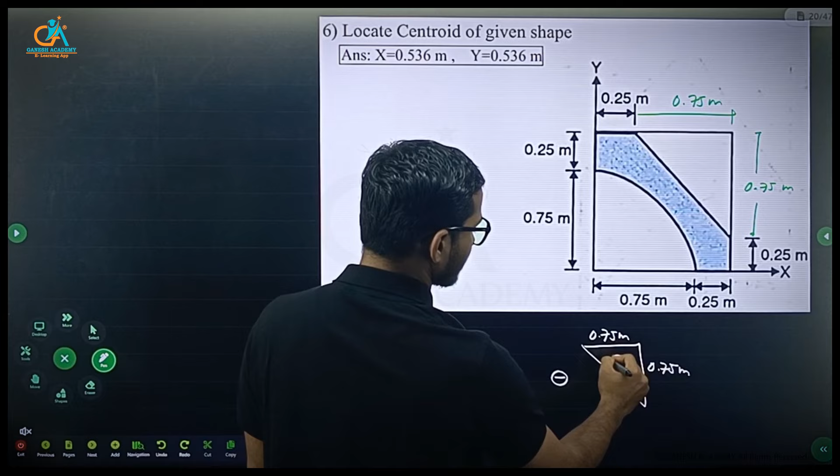So it is in the first quadrant. All the values of x and y at that point simply mean the individual centroid coordinates will be positive. So let's find it first for the square.

First figure, square of side equal to 1 meter. This is the x-axis, y-axis, this is origin. Here the centroid will remain at the center of the individual square, so G1.

This distance is x1, and this distance is y1, correct. So what is the area of this? 1 by 1, so 1 meter square is the area.

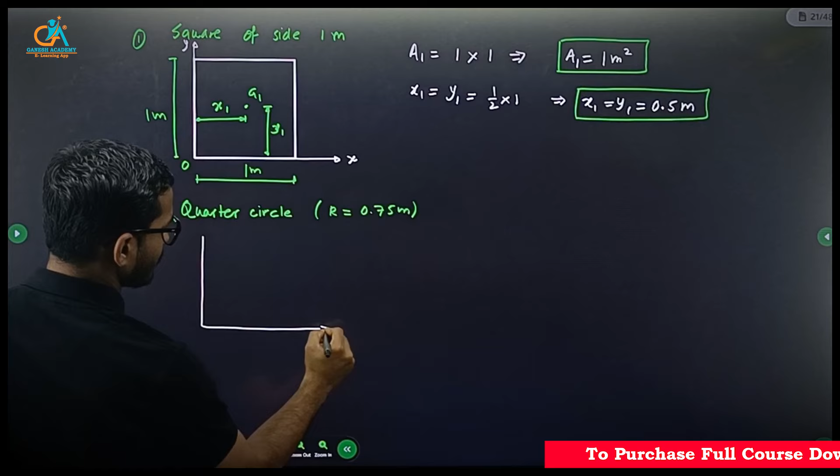Having radius equal to - this is the radius - 0.75 meter, with x and y axis. This is origin O, radius is 0.75, correct.

The centroid is somewhere here, let's say G2 for the second diagram. This is the first standard area, second standard area, and this will be y2 and x2. So x2 and y2 are nothing but the coordinates of the centroid point G2.

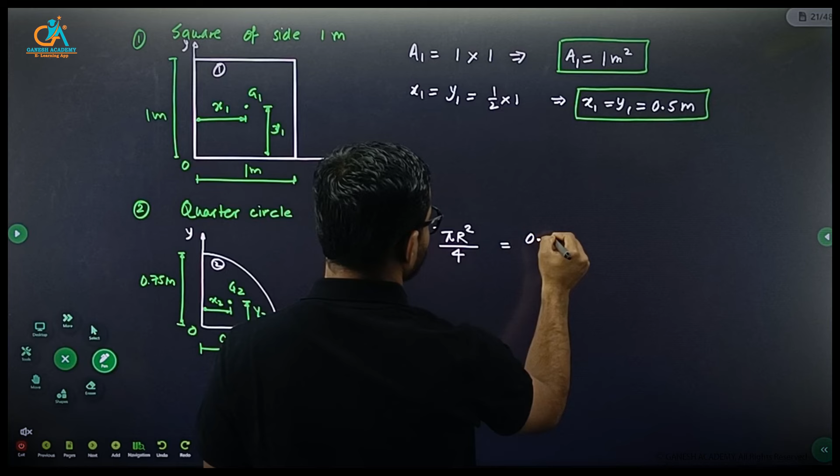First find the area. So area 2, that means area of second figure, quarter circle. Area of circle is pi r square, and quarter circle is 1/4 of the circle, so area will be pi r square divided by 4, where radius is 0.75.

This comes out to 0.441786, which you can approximate to 3 or 4 decimals as 0.4418 meter square. Then next is x2 and y2.

For the quarter circle, from this origin, x2 and y2 are both identical, so y2, x2 equals 4r by 3 pi. That is equal to 4 into 0.75 divided by 3 pi, which gives 0.3183. So x2 as well as y2 equals 0.3183 meter.

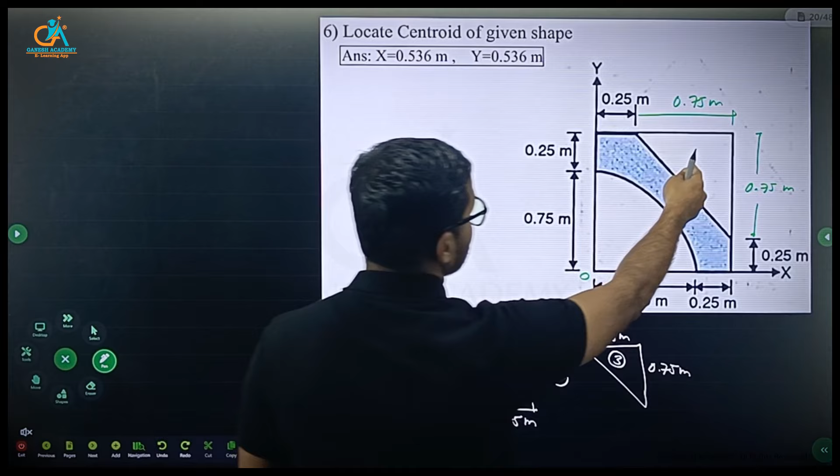Then the third figure is the right angle triangle, with x-axis like this and y-axis. This is 0.25 and this is 0.75 meter, this is 0.75 and 0.75, and obviously this is 0.25. Somewhere here you will have the centroid for this right angle triangle.

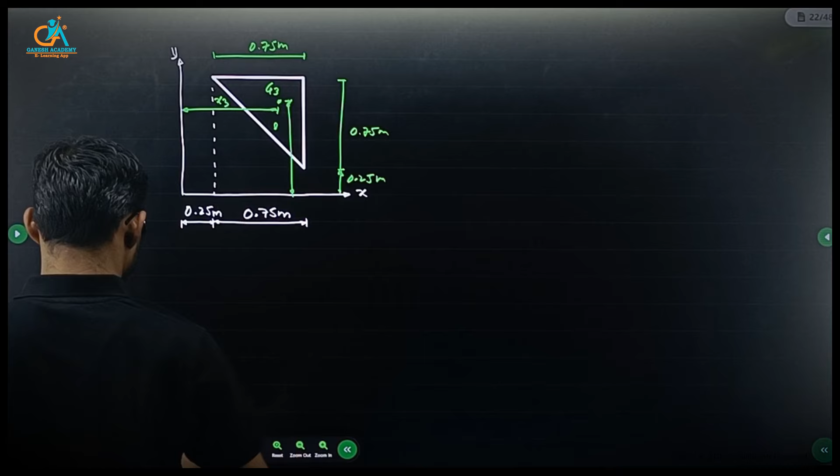Now this is x3, and here we will have y3. So find first the area - this is third figure, A3 for triangle, that is half base height, where base and height both are 0.75, giving 0.28125 meter square.

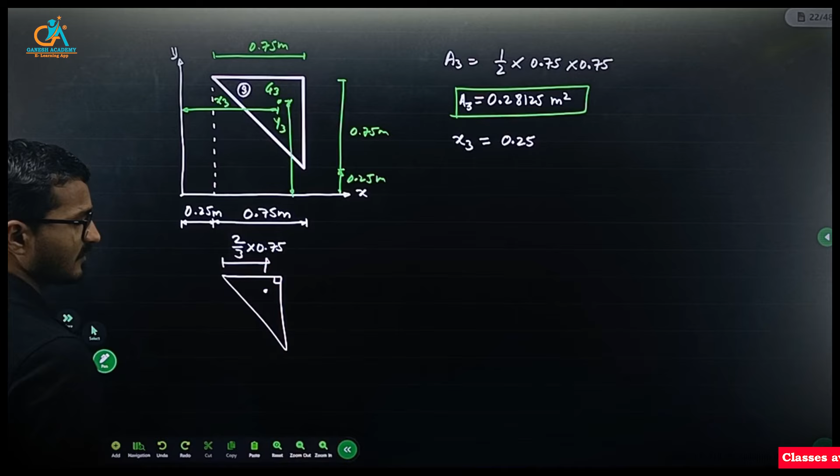Then x3 is - this is 0.25, and for this triangle from this side your distance is 2/3 of base, where base is now 0.75. So we need to add this distance 0.25 plus 2/3 of 0.75. So with respect to O, the x coordinate of the centroid is 0.25 plus 2/3 of 0.75, which comes out to 0.75 meter.

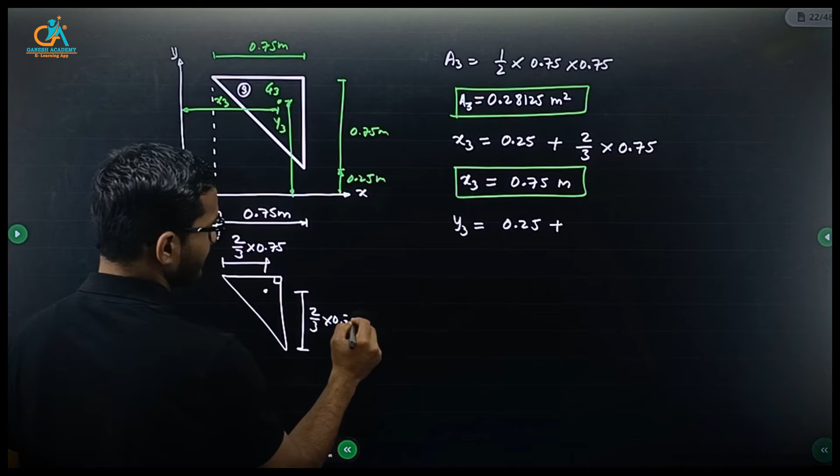Then y3, again same - this is 0.25 plus this distance, which is again 2/3 of 0.75, by standard formula. So 2/3 of 0.75, similarly y3 is also 0.75.

Now substitute all the values in the formula. X coordinate of the centroid equals summation of A,x upon summation of A, by the concept of moment of area. So it is a combination of three figures where we are subtracting the quarter circle and right angle triangle from the entire square: a1x1 minus a2x2 minus a3x3, whole divided by a1 minus a2 minus a3. Area 1 is 1 and x1 is 0.5.

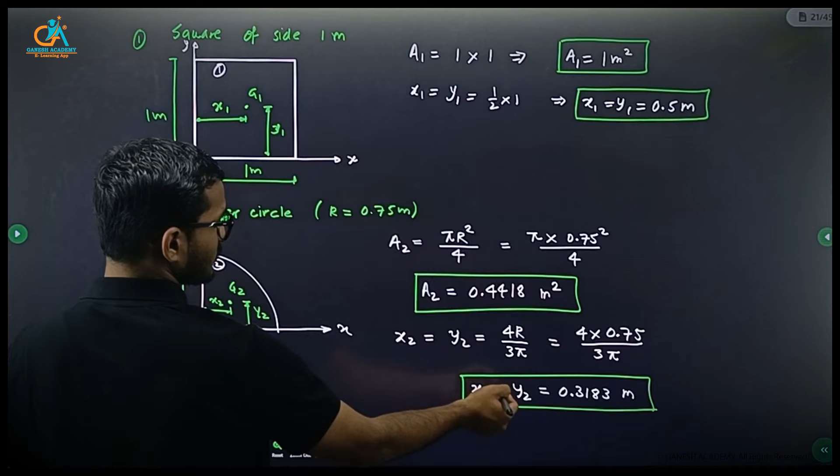Then area 2 is 0.4418, into CG distance x2 which is 0.3183, minus A3 which is 0.28125, into CG distance 0.75, whole divided by area 1 minus area 2 (0.4418) minus area 3 (0.28125).

Calculate the value of x bar. So it is 0.5359, approximately 0.536 meter.

In the same way, y coordinate of centroid, y bar, equals summation of ay upon summation of a. So a1 y1 minus a2 y2 minus a3 y3, whole divided by a1 minus a2 minus a3.

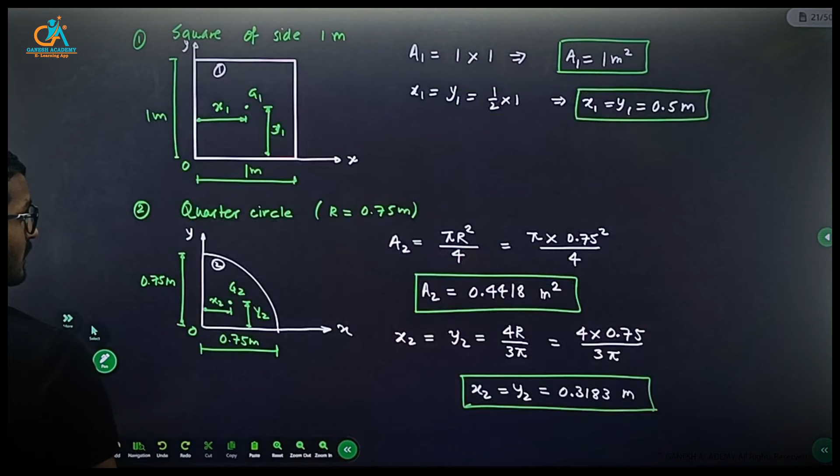So 1 into 0.5, then 0.4418 is the area, into y2 is again same, 0.3183, and y3 is again 0.75. So 0.3183, 0.28125 into 0.75, then 1 minus 0.4418 minus 0.28125, which is again same, 0.536.

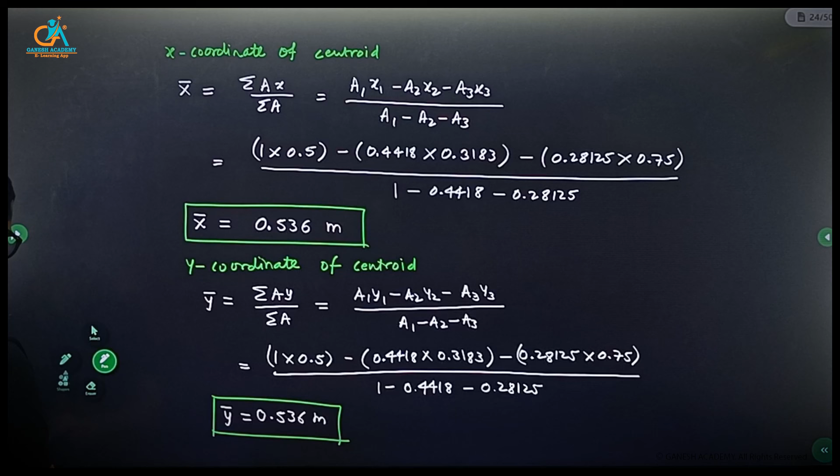Okay, so as the given figure is symmetric, what you can say? The x and y coordinate is identical.

So you can draw an axis of symmetry, something like this. About that axis of symmetry, it is symmetric, so your CG will lie somewhere here, both same. So here we have centroid G having x and y coordinate as 0.536.

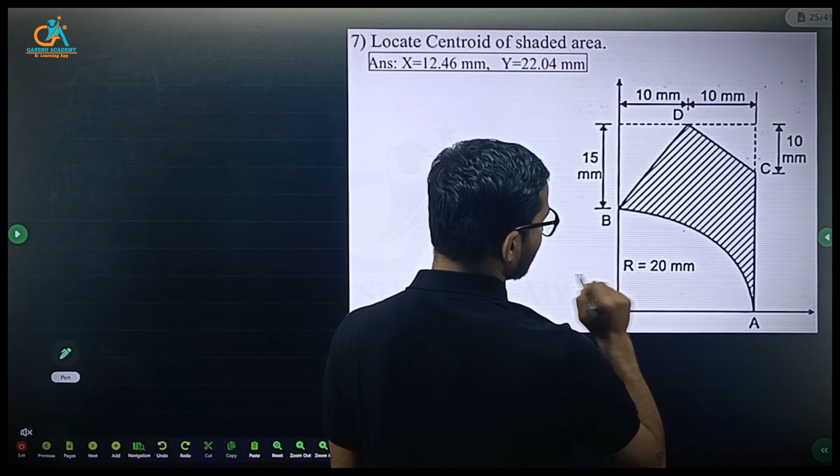In which we have to consider this entire rectangle and we have to subtract this, resembles as a quarter circle of radius 20 mm, and there is one additional triangle here. So kind of similar numerical, we have one additional standard figure here, so its centroid we need to find again, same right.

So what are those 4 diagrams? First is this rectangle, then in the same way you need to subtract these 3, right angle triangle, and then this quarter circle.

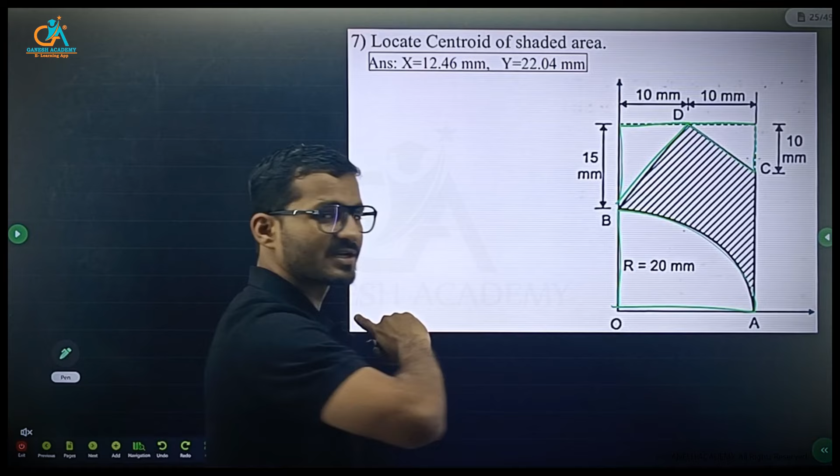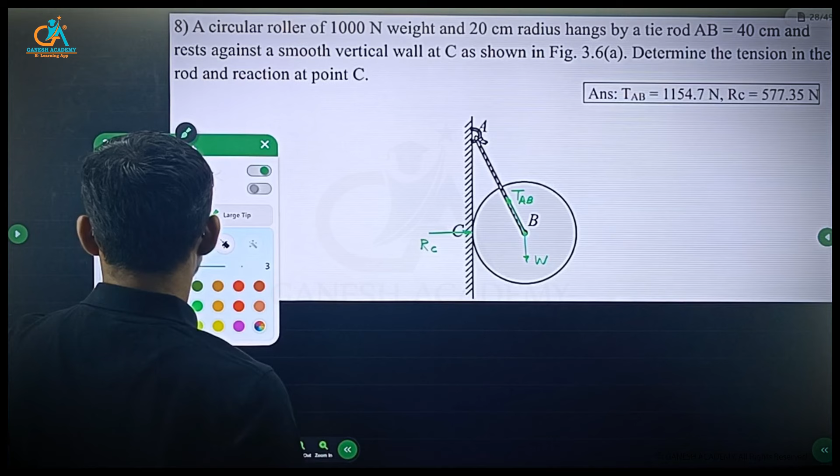Yes, so this is basically a roller. Here is the center through which the weight is supposed to act. Okay, now here we have reaction, and tension in rod AB.

Now I am going to consider this line of action, and I can just shift this force, and make the point of application through the center only, that is B. So what I'm going to draw is the same diagram, but with a different point of application for this RC.

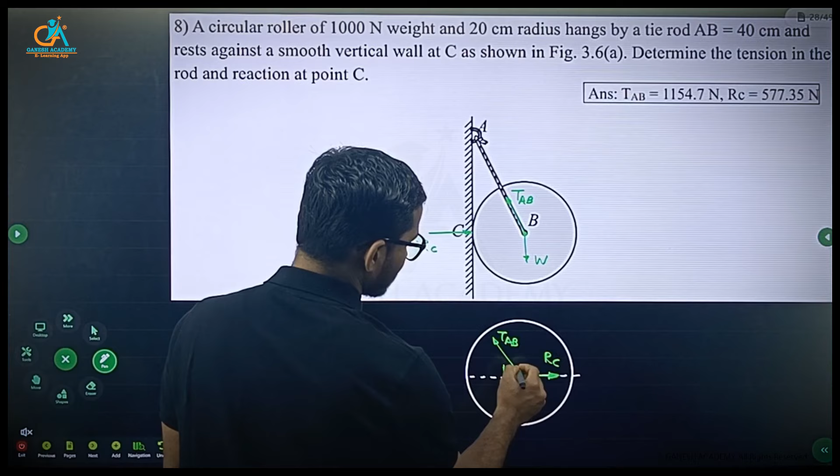Now using Lami's theorem, you can easily find the tension in the rod and the reaction at C. First we have to find the angle between these two forces. This is basically a concurrent system involving three forces, pull type of forces. So first we have to find this angle. This is straightforward 90 degrees, but we have to find the other angles. Okay, how to find those angles?

So there is some data given. This weight is 1000 Newton and the radius is this radius, it is 20 centimeter. And the length of AB is given, which is 40 centimeter. So what I am going to draw here is the triangle.

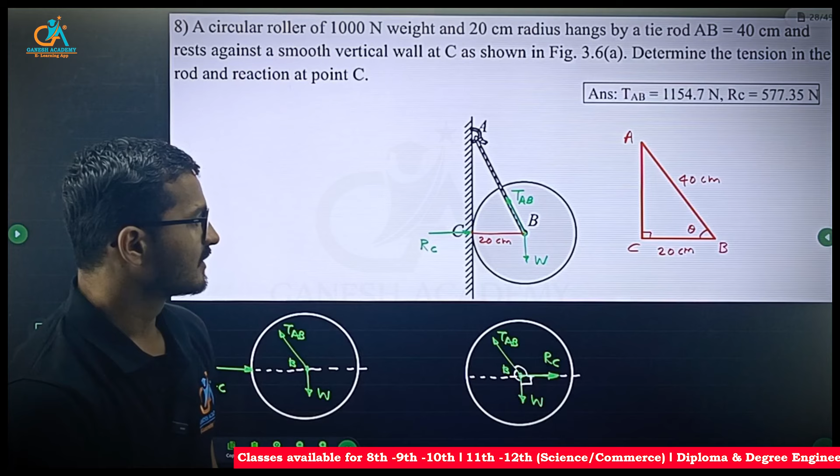So there is a triangle, this triangle A, C and B, a right angle triangle. I can find this angle, correct? This is 20 centimeter and this length of AB is 40 centimeter. Let's say that angle is theta, correct? So using trigonometry you can easily find this.

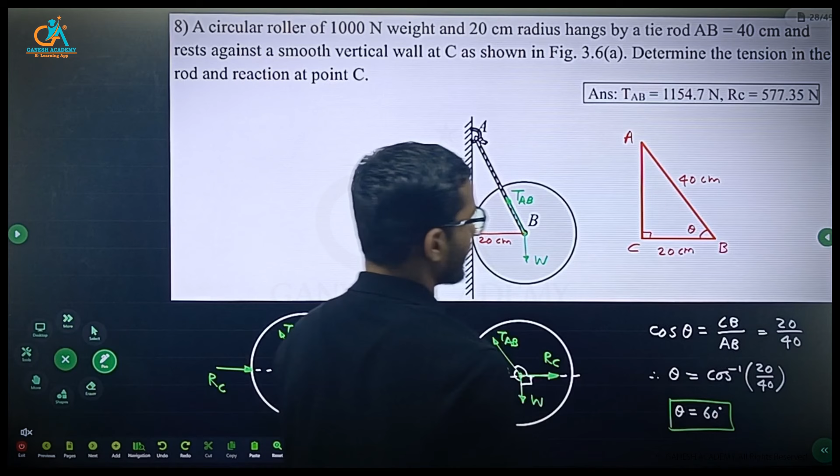Adjacent side and hypotenuse, that means you need to consider cos. So cos theta is adjacent CB over hypotenuse AB, which is equal to 20 and 40. So theta is equal to cos inverse of 20 by 40, which comes out as 60. So this theta is 60 degree. So this angle is 60 degree, correct? This angle is 60 degree.

Now I need to find these angles between the forces, right? So consider this diagram.

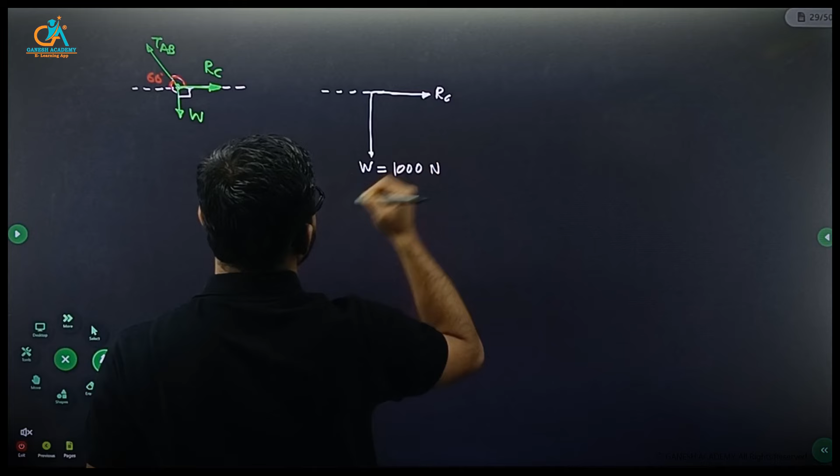There is one force W which is equal to 1000 Newton, and this is RC, correct? And here we have tension in rod AB. This is 90 degree. If this tension force is making an angle 60 degree with the x-axis, this entire angle will be 90 plus 60, that is 150. And if this is 150, this is 90, the remaining angle should be 120, as we all know the addition of these three angles is equal to 360 degree, right?

And now you can conveniently use the Lami's theorem to find the reaction at C and tension in rod AB. What is the Lami's theorem?

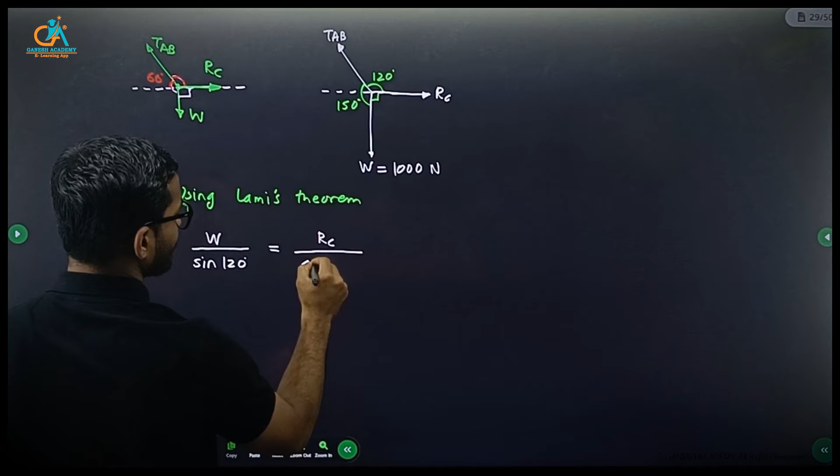The force divided by sine of angle opposite to the force, 120 degree, that is equal to RC divided by sine of 150, and that is equal to tension in the rod AB divided by sine 90, right? Now solve for first RC and then for tension in rod AB.

Now reaction at C, consider first two. W is known, W is 1000. And now solve for RC. It is 577.35. It is positive, means assumed direction is correct.

And now solve for tension in rod AB. Consider first and last ratio. W upon sine 120 is equal to tension in the rod AB upon sine 90, where W is 1000, sine 90 is you can write down as 1. And tension AB is equal to what? Sine 90 is 1, so what I can write is 1000 divided by sine 120, which is 1154.70.

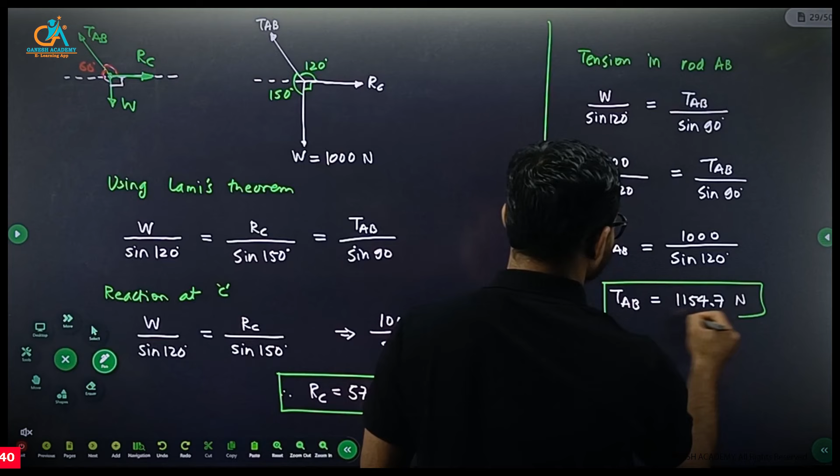Let's check the answers. Yes, both are correct, right? So first of all, you need to find what are the forces involved, then draw free body diagram and show the forces, concurrent forces for better understanding. So that means you need to simplify this into this, right? So concurrent force system involving three forces, so conveniently you can use Lami's theorem here, right? And for the angles, you have to consider trigonometry here, right?

So it is one of the similar numerical from the previous case. Find the tension in each cable. So from diagram you can say there is one cable AC and there is one cable BC, and at C the weight is attached, the mass of 100 kg is attached at point C, and the angle made by the cables is given. One of the angle is given and one the slope is given, right?

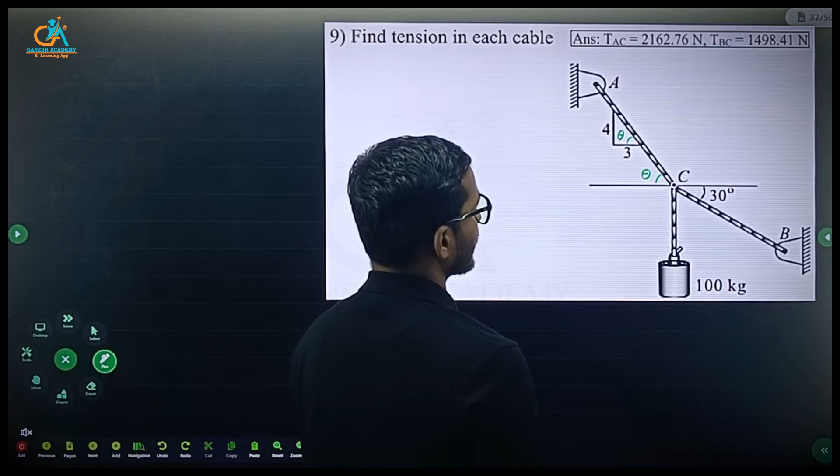So before drawing FBD, we'll first calculate the angle. So here, let's say this is theta, means this angle, right? So consider that right angle triangle. So 4 vertical to 3 horizontal. This is theta. So theta is equal to tan inverse of 4 by 3. It is 53.13, correct. So this is the angle.

Now we have to convert this mass, 100 kg mass, into weight, basically force. So force acting due to mass of the body, we have to multiply this with 9.81, right? So what is weight? mg, and weight is due to gravity. So by Newton's second law, F is equal to mass into acceleration, and weight is nothing but contributed because of the gravity, which means acceleration is due to gravity, and the value is standard 9.81. Unless mentioned, you have to consider 9.81, right?

So first we'll draw the same FBD, right? So obviously weight is going to act in the downward direction, and in the same way, whatever the weight, as these are collinear forces, the tension developed in the cable will be same, right?

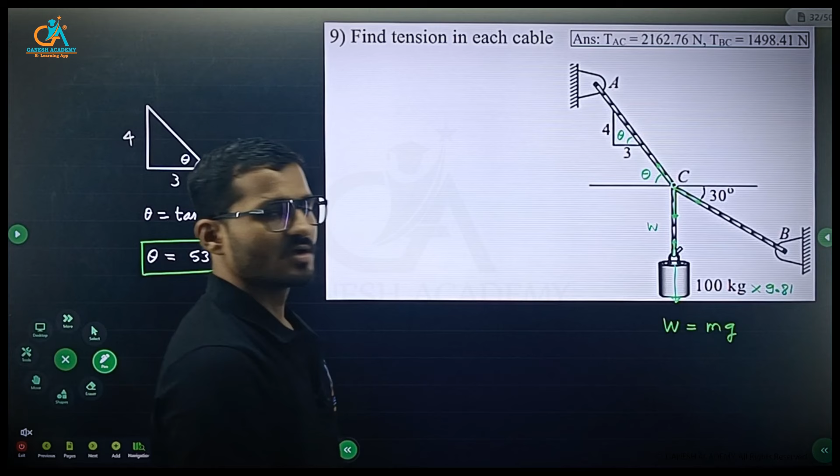And obviously we can show that this is equal to W, right? And here again, these are the tension forces developed in the cables AC, BC, and due to this weight, this weight is nothing but the tension in cable, which is attached to the body.

So let's draw the free body diagram. This is point C. There is weight acting in vertical direction, and there is tension in BC cable, acting at 30 degree with horizontal, and this is tension in AC acting at 53.13 degree with the horizontal. This is your forces, right?

Again we can use Lami's theorem, right? Yes. So we'll find whatever the angles between the forces. Okay.

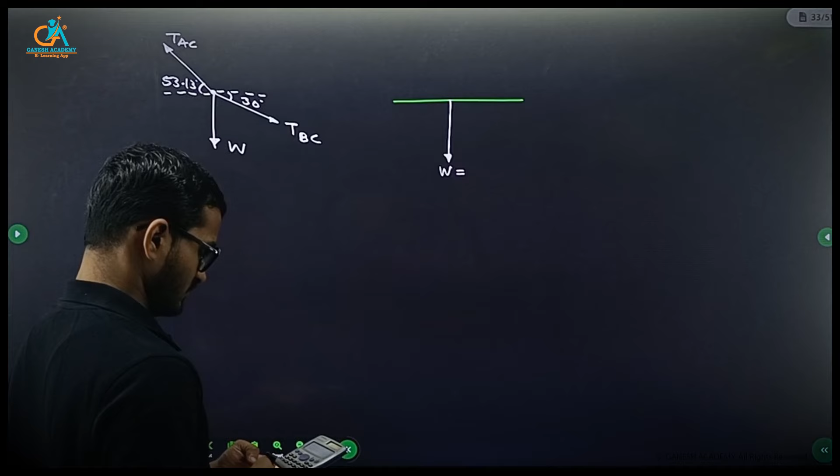This is weight W acting vertically downward, and that is equal to Mg. So 100 into 9.81, 981 Newton.

Okay. The next, the tension force TBC. If this angle is 30, this should be 60, right? Okay.

And we have one tension force AC, right? If this is angle 53.13, this whole angle is going to be 90 plus 53.13, 143.13, and the remaining angle you can easily calculate. 360 minus 60 minus 143.13, that angle is 156.87 degree, right? Use now Lami's theorem. Yes.

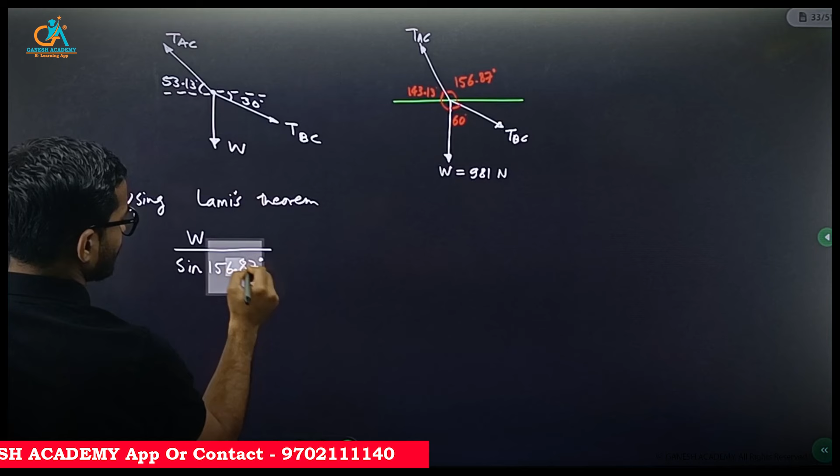What you can write is W upon sine of 156.87 is equal to tension AC divided by sine 60 and tension BC divided by sine of 143.13. So consider first two to get tension in cable AC.

Yes, W upon sine 156.87, that is equal to TAC upon sine 60. Okay, what is the value of W? 981.

Now solve for tension AC. 2162.756 you can write.

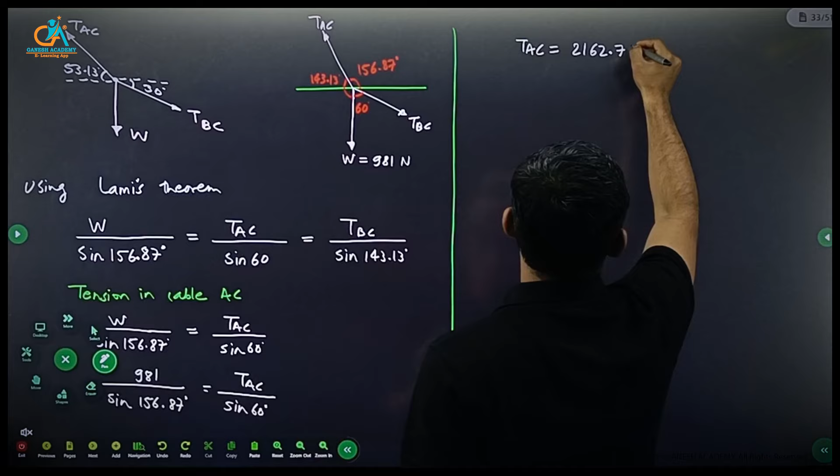And now tension in cable BC. Yes, consider first and third or any two. So W upon sine 156.87, that is equal to tension BC upon sine 143.13. W is 981.

Yes, again similar way solve for tension in cable BC. 1498.4.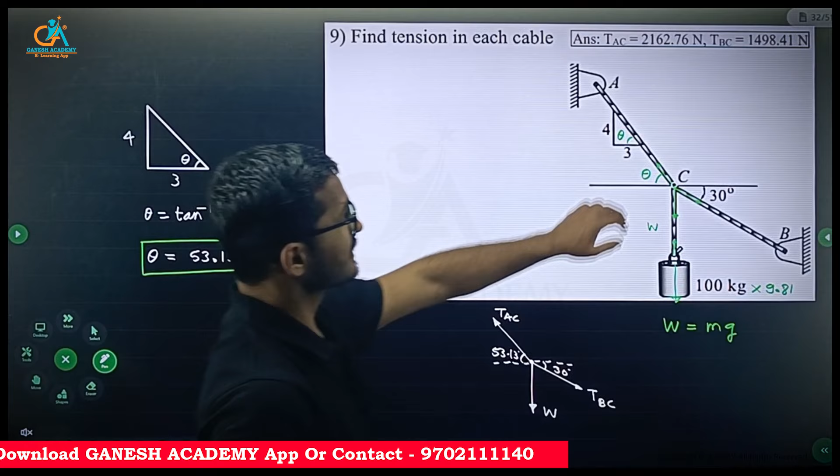Yes, let's check the answer. 2162.76 and 1498.4. Minor changes, that is fine. So both are correct. Okay.

10th numerical. Again, it is kind of similar numerical to this earlier one. This is based on the same concept. Just here, instead of a vertical surface, here we have an inclined plane. So a roller of weight W 1000 Newton.

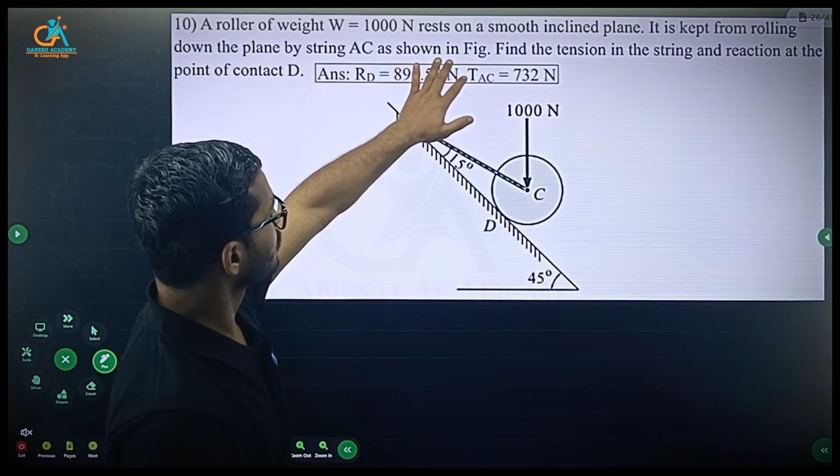So this is weight. Rest on a smooth inclined plane. It is kept from rolling down if it is not attached with anything, obviously due to its own weight, component of weight along the plane, it will roll down, but it is kept from rolling by attaching it to a string, string AC, as shown in figure, find the tension in the string and the reaction at point of contact D.

So in the same sense, obviously we have to find this reaction and tension in the string. So what will happen, at the point of contact you will have this reaction RD, correct, and in the same way there is tension in string AC, but here a little bit of trigonometry is involved.

So first we have to find the angles, right? Correct. So first draw free body diagram. Okay.

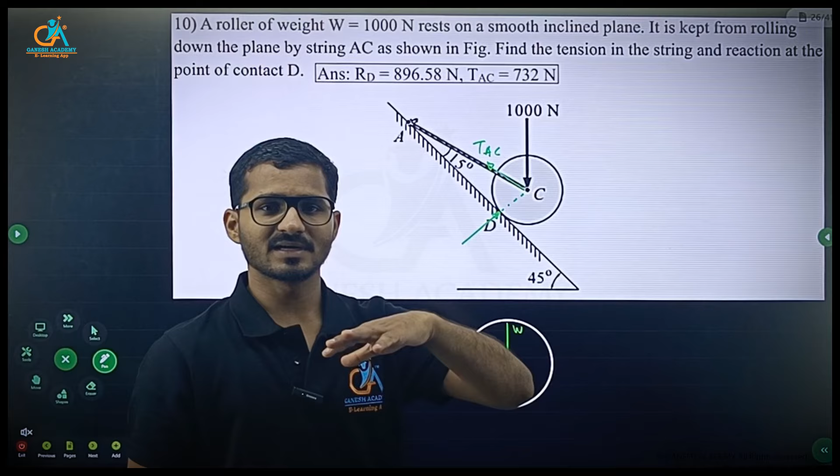The center of circle, and we have this weight acting in this direction. What we know from the trigonometry, at the point of contact, this plane will be tangent, and the radius, obviously we have some theorems from our school time, so this is perpendicular, right? The radius will be perpendicular to the plane of inclined plane at the point of contact. So somewhere here you will have this reaction at point of contact D, and obviously you will have this tension in string AC.

So for the simplification, what we are going to do here is I'm going to use the principle of transmissibility, right? So instead of showing this weight here, I'm going to consider here, right? And instead of this reaction here, I'm going to show that same reaction along the line of action, right?

Okay. Now the next part is to calculate the angles, right? This is, let's say, horizontal. Okay. So I have to find whatever the angle made by this and this with horizontal. So let's extend this just to meet this horizontal line. We know this is 90 degree, this is 45, so this angle should be 45. As we all know, the summation of interior angles of a triangle is 180.

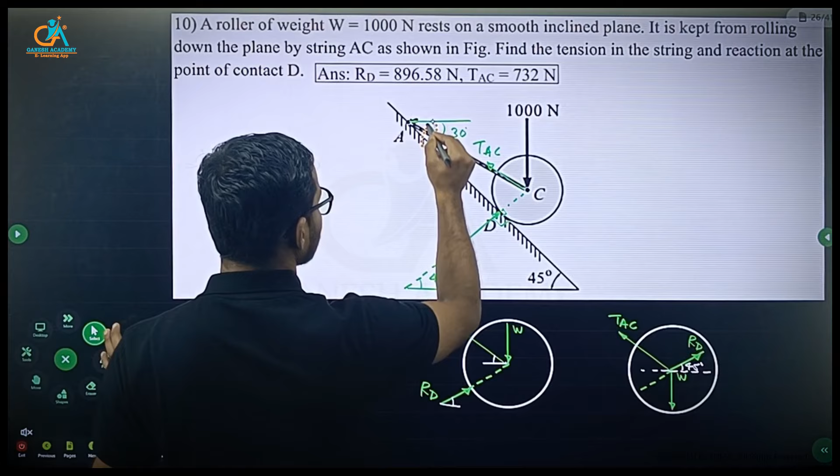And if this is 15, this angle should be 45 minus 15, 30. So this is going to be the angle, correct? So the angle made by tension, what we can show is this is 30, right? Correct? These two angles are equal. So correct? Yeah, let's just draw.

Yes, this is the FBD. Draw the weight vertically downward, the reaction RD inclined at an angle of 45, and the tension AC inclined at an angle of 30, with the point at center C. Now let's find the angles.

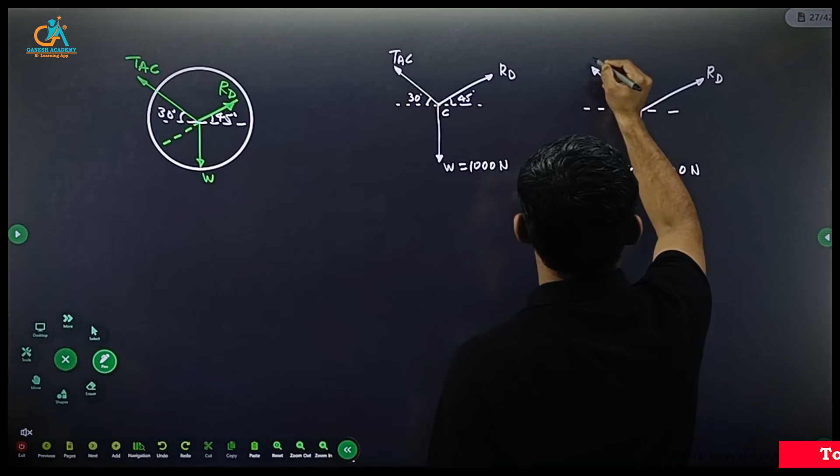Weight is 1000 Newton. This is reaction D, reaction at D, and tension AC. If this is 30, this angle should be 90 plus 30, which is 120 degrees. And this is 45, so this should be 90 plus 45, 135 degrees, and the remaining angle will be 105.

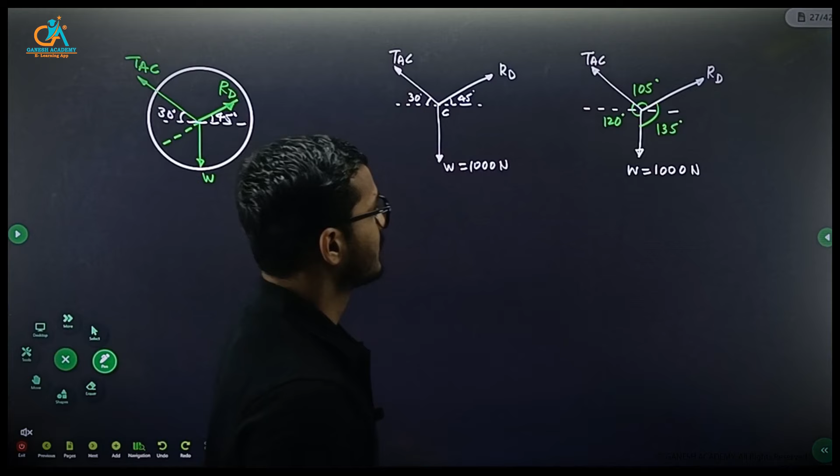Correct? Now apply Lami's theorem here. What I can write is W upon sine of 105 is equal to tension in string AC divided by sine of 135, and RD upon sine of 120 degree. So let's first consider the first two ratios.

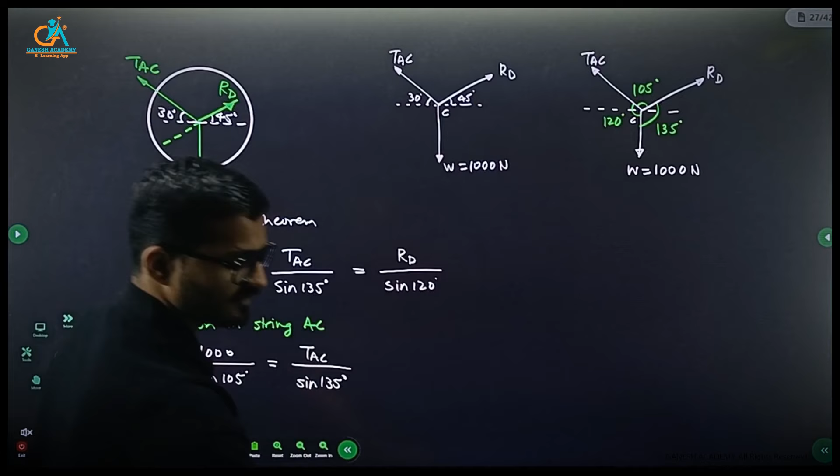So tension in string AC: W, which is equal to 1000, divided by sine 105, equals tension in string AC divided by sine 135. From this you can say tension in string AC is 732.05.

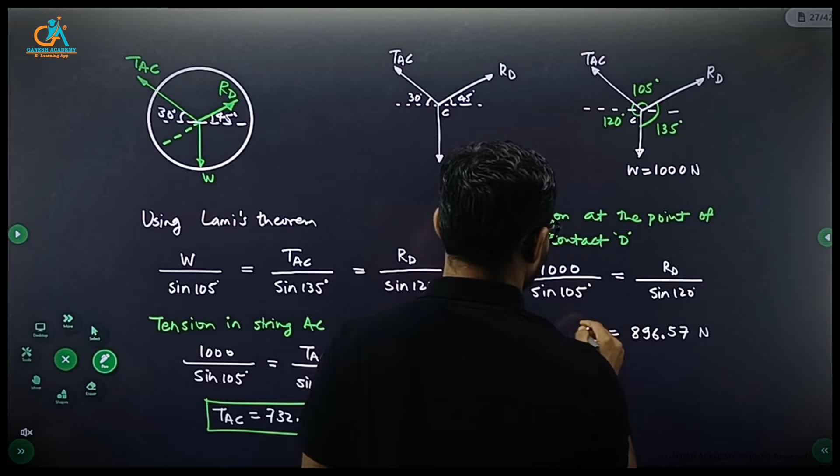Correct? Yes, next reaction at D. So W upon sine 105, that means 1000 upon sine 105, is equal to RD divided by sine 120. That gives 896.575. Both 732 and 896 are correct, right?

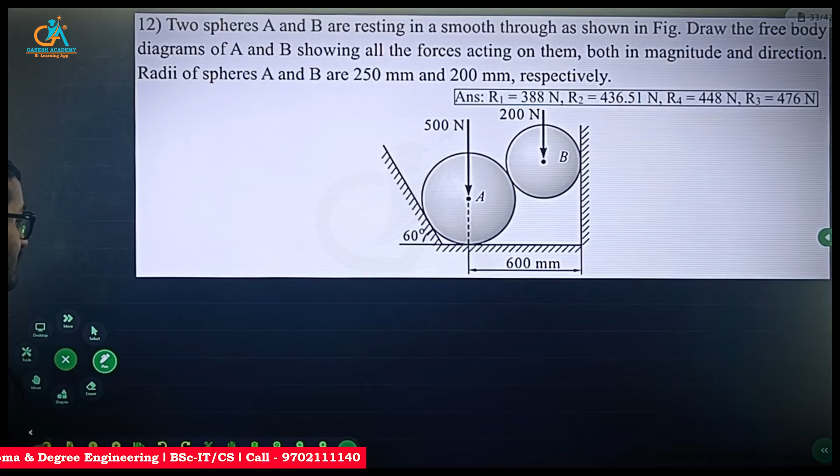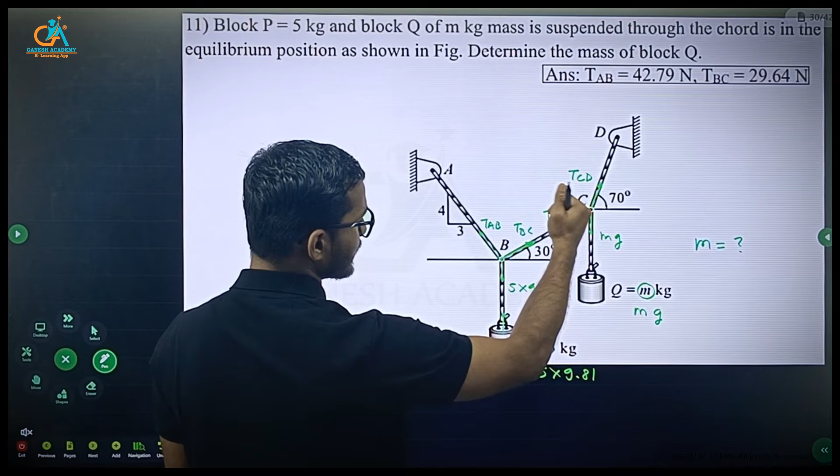Let's say this is TAB, this is TBC. Obviously it will be balanced like this - this is mg and these forces, tension CD. So what you can draw is the free body diagram. Consider first point B, and then we can find tension AB and tension BC, and use the same value to find the value of M.

So due to the equilibrium condition given, we can use this. At B, the system is in equilibrium, so whatever weight is attached, drawing the FBD, is 5 into 9.81. Here we have forces, and angle - this is 30 degree.

And this is theta, for example, and theta is equal to tan inverse of opposite is 4, adjacent is 3, that means 53.13. So this angle is 53.13. So we have tension BC and tension AB.

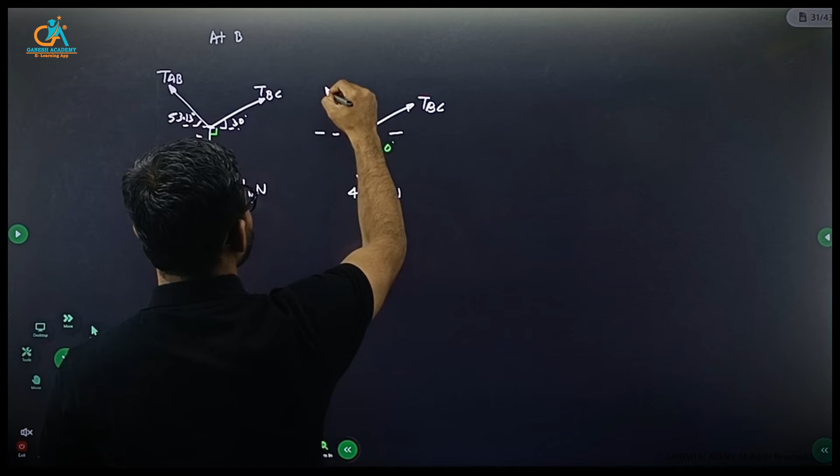So this whole angle should be 143.13 degree, and the remaining angle, using the summation equal to 360, minus the others, is 96.87 degree.

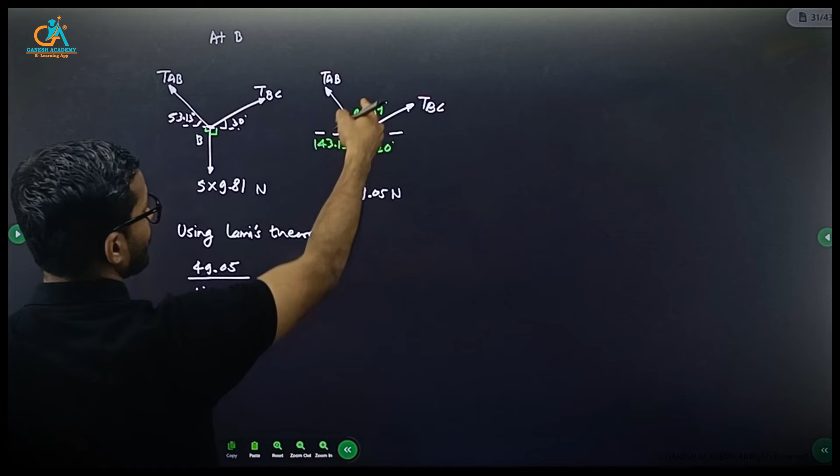Is there any need to find tension in the cord AB? No, but we need to determine the mass of block Q. Anyway, we have to find just BC, but let's find tension in cord AB as well. So first, tension AB.

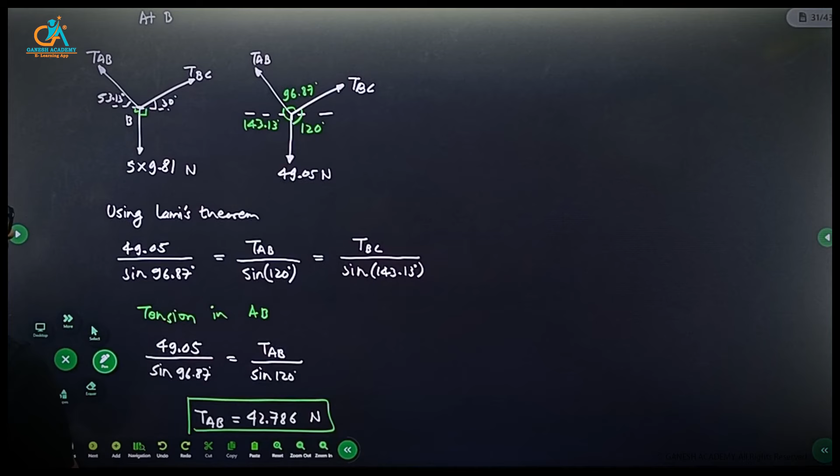Yes, 49.05 divided by sine 96.87, tension AB is 42.786 Newton. Is it 42.79? Yes.

And then tension in BC is 49.05 divided by sine 96.87, and TBC divided by sine 143.13 degree, giving 29.64.

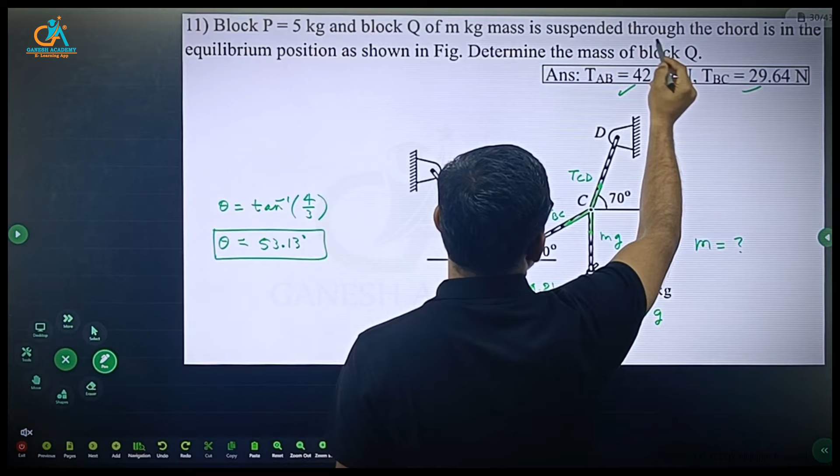Okay, so it is correct, but they are asking for the mass of block Q, which is not mentioned in your question bank. Obviously, as they are asking mass of block Q, how do we find it?

Now consider point C. Obviously this should be in equilibrium - the forces should balance each other. So at C, the tension in CD, TCD, is at an angle of 70 degrees. What will be this angle? This is again 30, right - these two angles are 30. So the vertical force at C, there is weight mg.

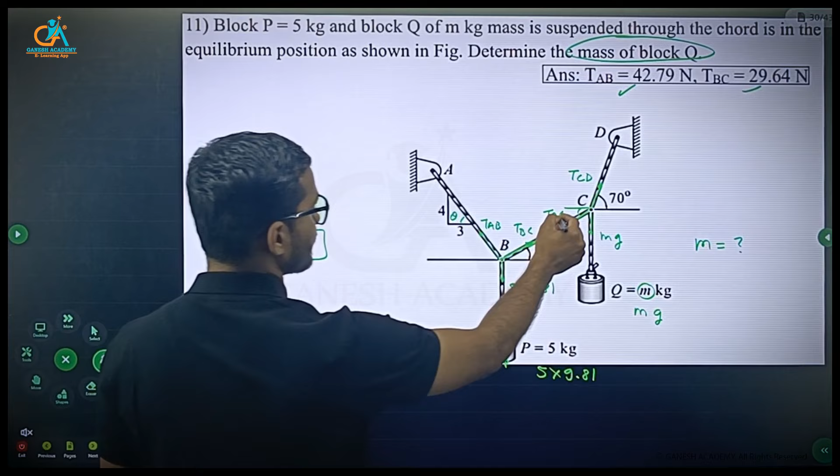At which angle is it given? 70 degree. Look, for equilibrium, whatever force will be balanced by an opposite force. So TBC for point C should be taken in this direction, and it is at an angle of 30 degree with the horizontal. Now we know TBC, which is equal to 29.64.

Okay, using Lami's theorem. So before that, find all the angles: Tension CD, mg, and TBC, which is equal to 29.64. Now this angle should be 70 plus 90, so 160 degrees. If this is 30, this should be 60 degrees. And what is the remaining angle? 360 minus 160 minus 60 equals 140.

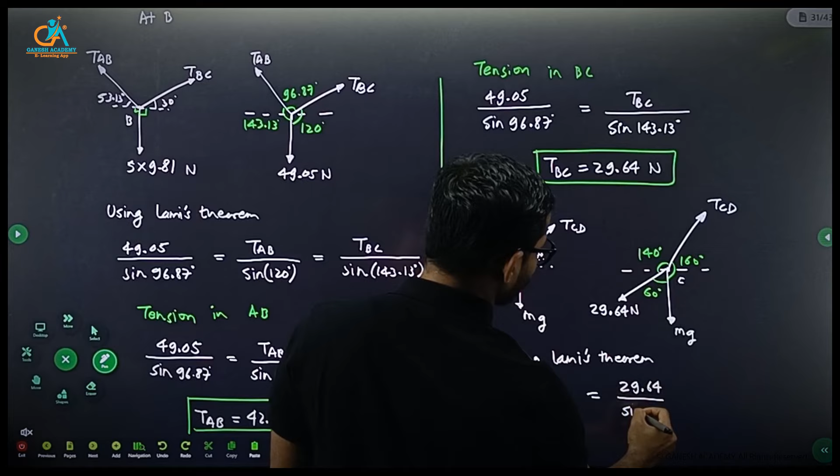Now again use Lami's theorem. What you can write is mg divided by sine 140 is equal to 29.64 divided by sine 160, and tension CD upon sine 60. So consider...

Consider the first two: mg over sine 140 equals 29.64 divided by sine 160. So m is unknown, g is 9.81, sin 140, 29.64 divided by sin 160. So what I can write is m equals 29.64 divided by sin 160, into sin 140, divided by 9.81.

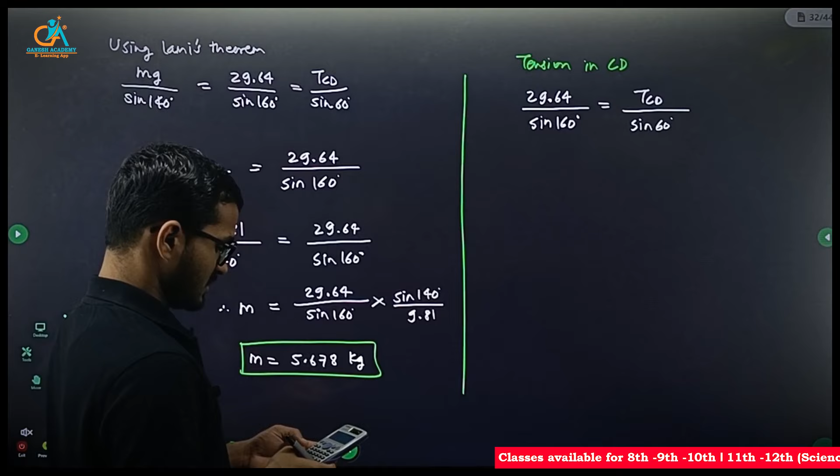75.05. Okay, so there is no answer mentioned for the block Q in your question bank, so this is the answer of your question: mass of block Q.

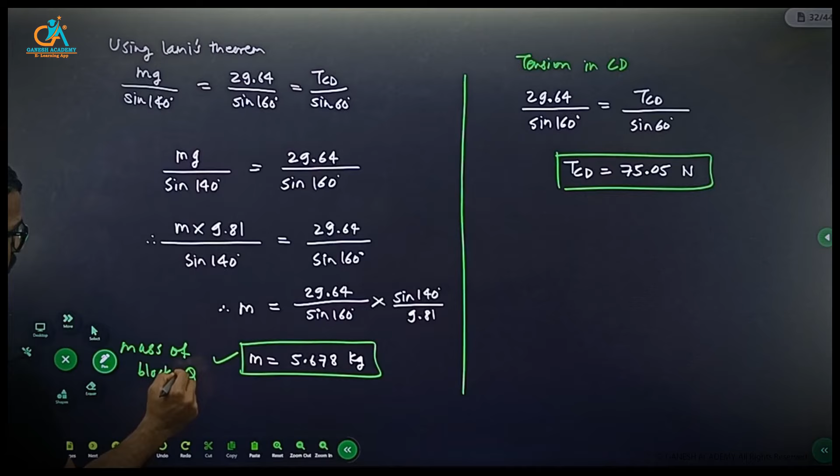Okay, the last question for this question bank is on the same equilibrium topic. Two spheres are given, A and B, resting on a smooth surface, smooth from all sides. Draw free body diagrams of A and B showing all forces acting on them, both in magnitude and direction. Radius of sphere A and B is 250 and 200 mm respectively.

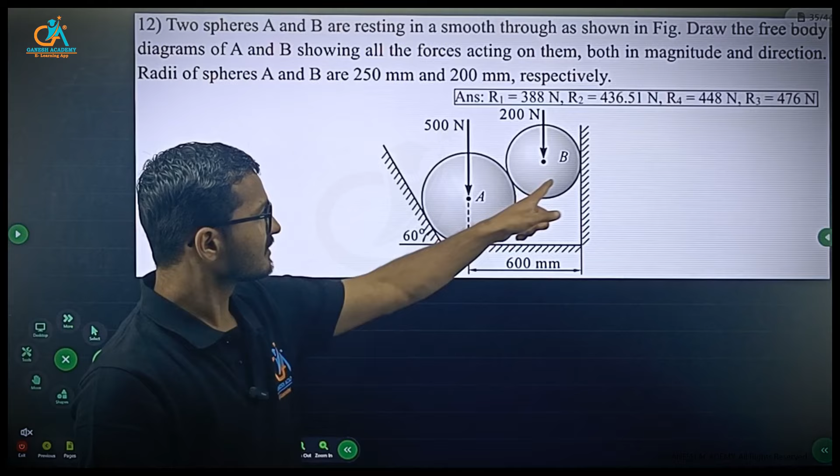So first, these are two spheres A and B. At this point A, let's say, and this second and third point are in contact with the smooth surface, and at this particular point they are in contact with each other. So obviously there will be some reaction there. Let's say this is R.

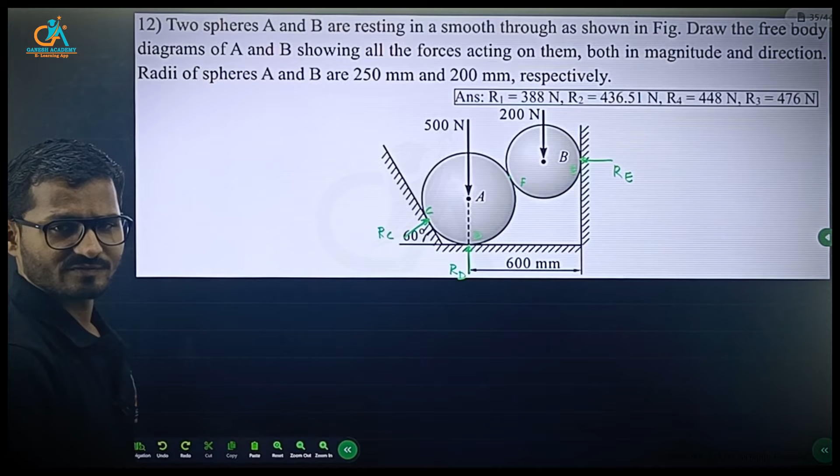1, 2, or any letter you can consider. So let's give this as C, D, E, and this point as F. So RC, RD, RE, and here you will have RF. Okay, so draw a diagram showing the free body diagram.

Okay, something like this. So through this, the weight is supposed to act: 200 Newton and 500 Newton, and there is one reaction here, RE. There is one reaction here, RD. There is one reaction here, RC. Okay, these are the forces. But if you separate out these two spheres, A and B, you will get to know this reaction at the point of contact.

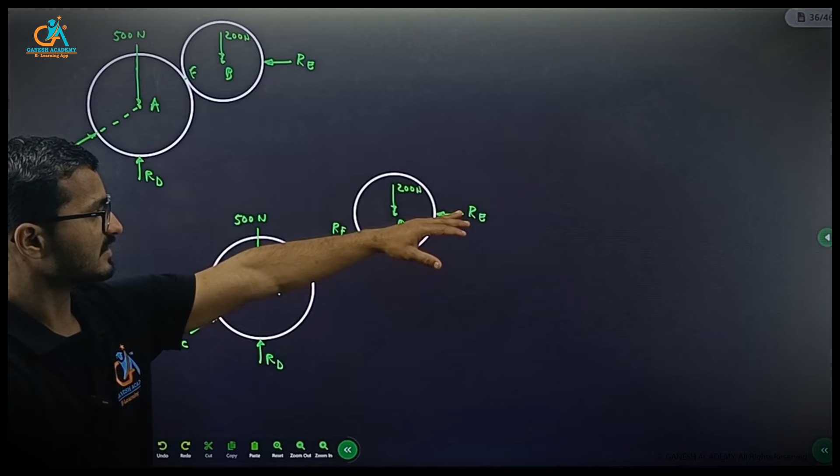Now let's move this away, or isolate this. So what will happen? Isolate this. So you will be having one reaction here, let's say that point is F. So this is point F, so we'll have reaction F, equal and opposite. Now first consider sphere B and find these reactions RE and RF, and then you can solve for sphere A.

Okay, so first of all we need to find the angles. This is 60, so obviously this angle should be 30 degrees, correct? So RC is making an angle of 30 degrees, correct?

Now, to find the angle made by reaction F here, draw a horizontal line. At the point of contact, obviously both radii of the spheres will be making an angle of 90 degrees with the tangent, and you can draw a straight line through A and B. Okay, this total is 600, so this distance is given.

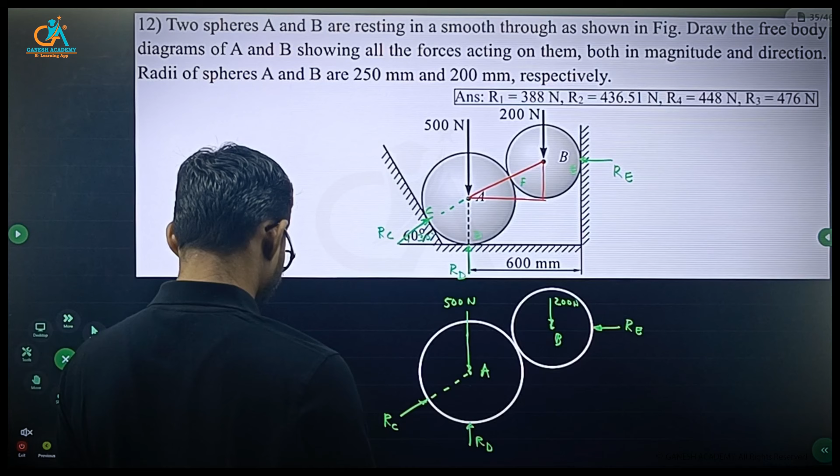The diagram is incomplete here; the distances are mentioned in the question, 250 and 200, right? So what we can find is this distance is nothing but a radius, which for sphere B is 200 mm and for sphere A is 250. So what will be the base of this triangle? Total is 600, 600 minus 200, so it is 400, correct? And this is basically the radius of sphere A plus radius of sphere B, correct? So draw a triangle.

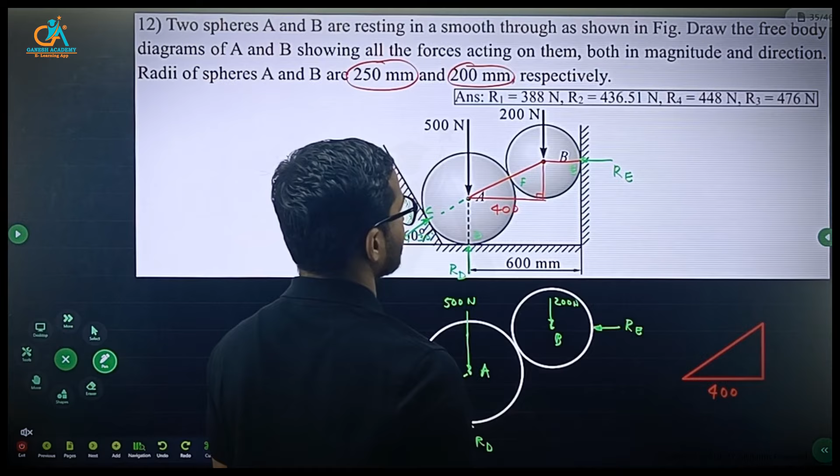Okay, so here it is 400, and this is 250 plus 200, 450. Okay, now I am going to find this angle which the reaction is making with the horizontal at F. So find this angle theta.

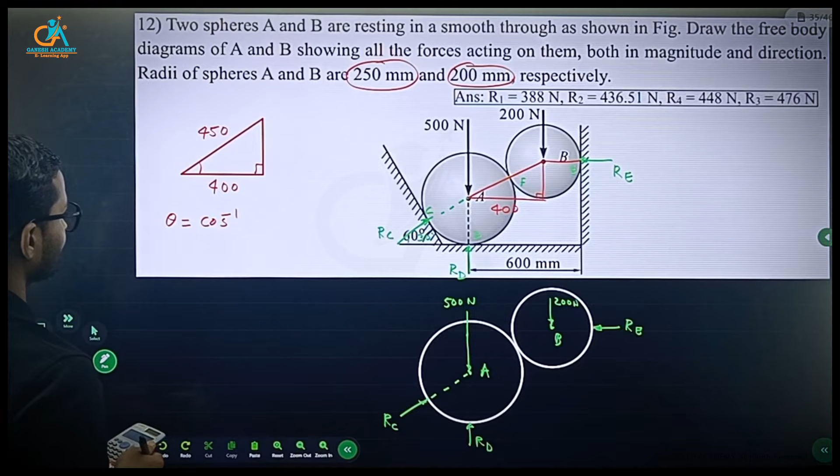So we can find this angle theta, which is cos inverse of 400 divided by 450. So the angle is 27.266.

So for sphere B, right, this sphere B. Yes, now consider for sphere B: draw a similar diagram with a concurrent force system.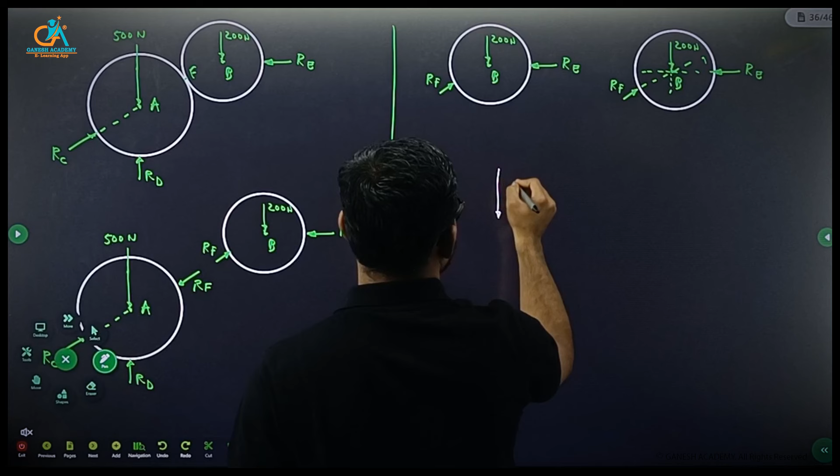Using the principle of transmissibility, what I can do is show this reaction force along the line of action, and in the same way, 200 Newton in the downward direction through the center of sphere B. Then reaction E, and reaction F, making an angle of 27.266.

This is exactly 90 degrees, right? Yes. So find the angle between them.

200 Newton. This is reaction E and reaction F. Yes, this angle should be 90. This angle will be 90 plus 27, 117.266, and the remaining angle will be 152.734.

So using Lami's theorem, find RE and RF. 200 divided by sine of 152.734 is equal to RE divided by sine 117.266, and that is equal to RF divided by sine 90. So consider first two. For value of RE: 200 sine 152.734 into sine of 117.266.

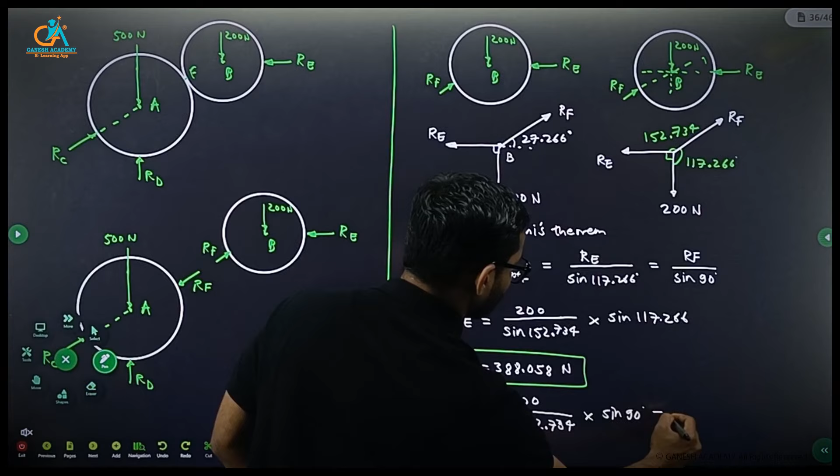Similar way, find RF. Consider first and third. So you will get 200 divided by sine 152.734 into sine 90, that is equal to 436.564.

Okay, now consider this sphere A. Now this reaction is known, RF, which is 436.564.

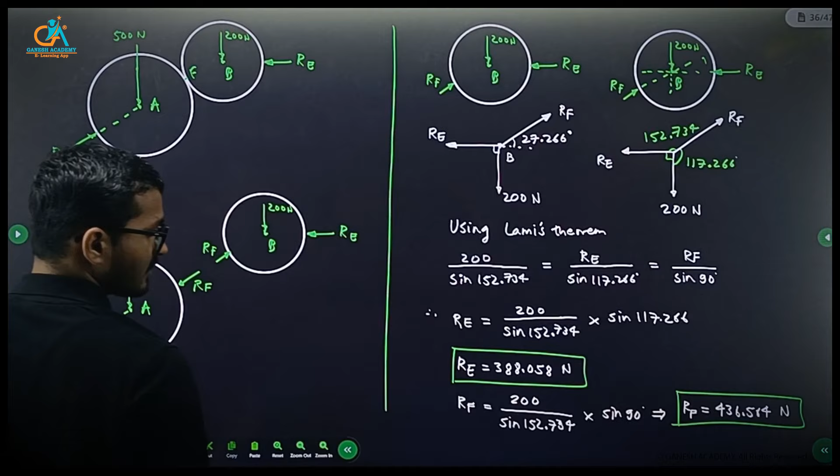Okay, now let's just draw the concurrent force system. So this is going to be vertical, right? So the resultant force will be 500 downward and RD upward. So you can just subtract them, they are collinear forces, right? Then RC is making an angle 30 degree with the horizontal. So what I can draw is RC making an angle 30 degree and RF is making an angle 27.266 with the horizontal. So here you can draw RF at an angle 27.266.

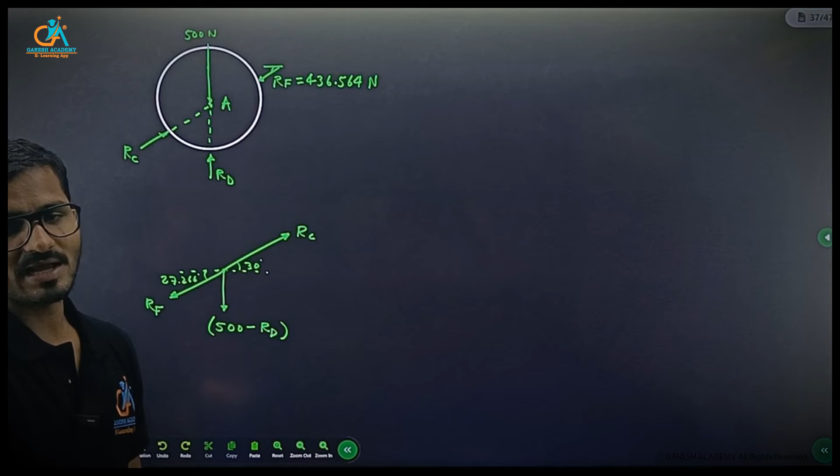Okay, so I have reduced the given force system which involved 4 forces, so I have simplified them to use Lami's theorem, which is only applicable when the 3 forces are concurrent.

Okay, now let's just find the angles between them. Yes, 500 minus RD, RC which is unknown, and this is RF. RF is 436.564. So now this angle will be 30 plus 90, 120 degree. If this angle is 27.266, this angle should be 90 minus 27.266, which is 62.734. Okay, and the remaining angle will be 360 minus 62.734 minus 120, so it is 177.266 degree.

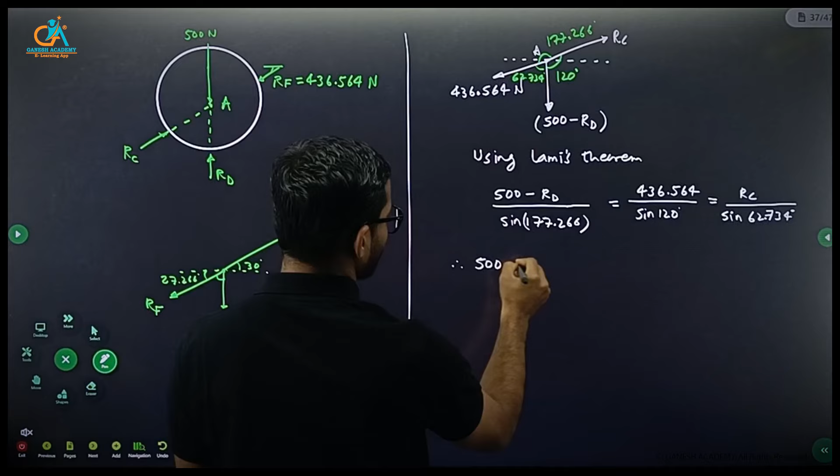Okay, first for RD consider these two. So 500 minus RD divided by sine 177.266, and that is equal to 436.564 divided by sine 120, and you can solve this for value of RD. You can simplify as well, right? 436.564 divided by sine 120, and this sine 177.266, which is 24.045.

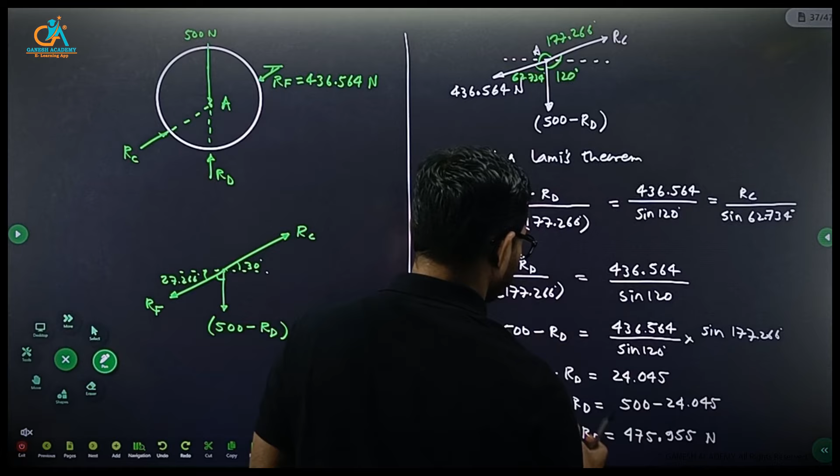It is 500 minus RD, and you can find RD as 500 minus 24.045, which gives 475.955 Newton. So this is correct, this is correct, this is correct, and the last should be around 480, 448, somewhere around that.

Consider these two. So solve for RC. From this you can write down RC is equal to 436.564 divided by sine 120, this shifts to the left side, right, sine 62.734, and 436.564 divided by sine 120 into sine 62.734. So it is 448.09.

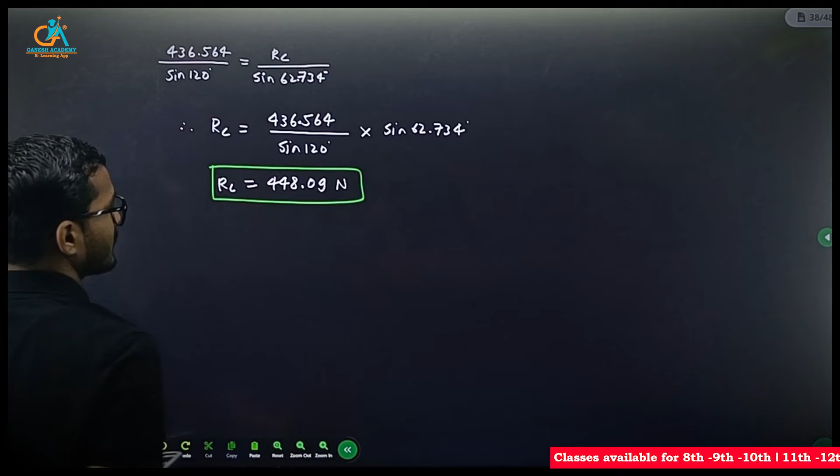Okay, so all our reactions mentioned in the question bank are correct, what we have solved. The answer from the question bank is correct.

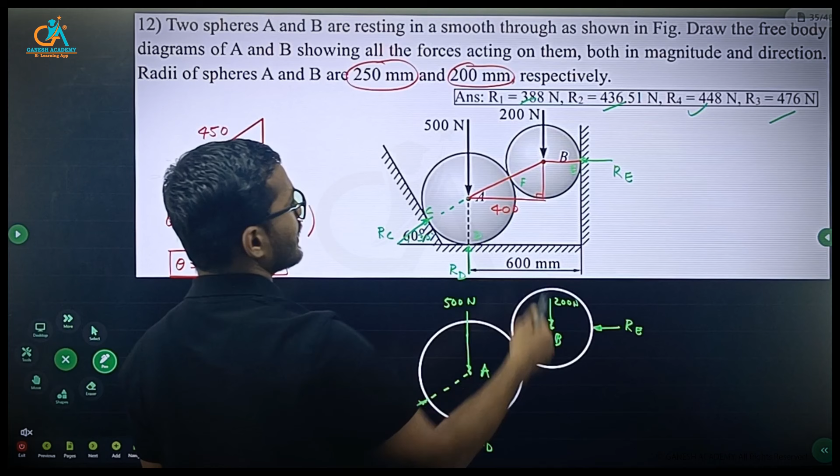So we can also solve this numerical by another method, which involves applying conditions of equilibrium. The system is in equilibrium, so reaction C, D, and whatever RE, and 500 and 200 Newton, these forces will be in equilibrium. So you can also find these by using conditions of equilibrium. Take moment at any point, let's say at point C, and then find the reaction at D, E, C, but which will involve too much trigonometry. So obviously we are going to avoid such type of scenario. We can easily find the reaction at contact surface and in between these two spheres at the contact by using Lami's theorem. Just you have to draw FBD first, and then you can easily solve for the reaction, right?